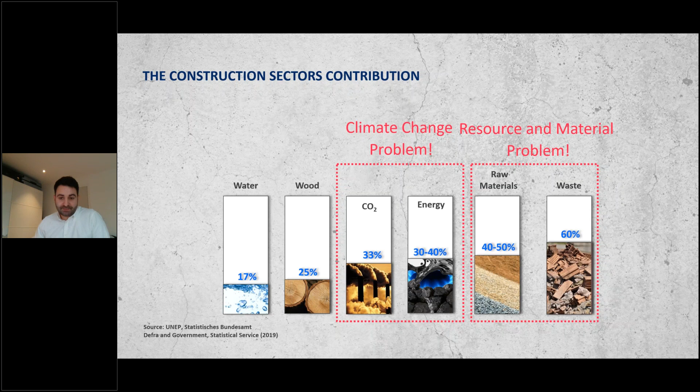With energy efficiency, we directly address the operational carbon footprint. You see here a carbon life cycle assessment of a tower in London which we analyzed recently, and you recognize in those carbon life cycle assessments typically that around 40 to 65% of the life cycle carbon is operational carbon, and the other part, around 35 to 60%, is embodied carbon, which is related to the materials we use. So at the point where we complete construction, we already emitted around 60,000 tons of carbon for such a tower.

To give you a scale, if you want to compensate that, you would need to run a wind park with around 17 turbines for 1 year. Compared to the operational carbon, which is around 5,000 tons per year, you would need to keep 2 wind turbines running throughout the entire lifetime of the project.

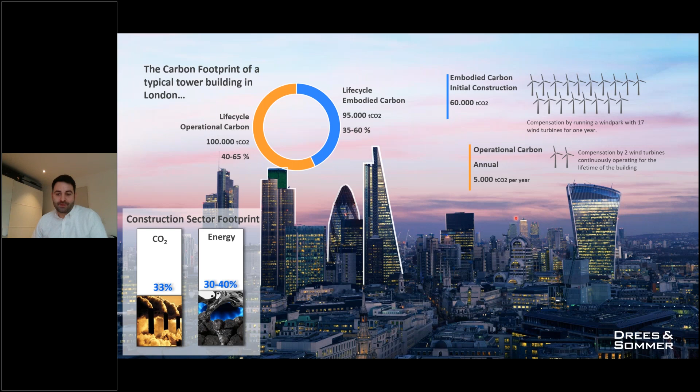To compensate operational carbon emissions, we address it with energy efficiency, and to compensate embodied carbon, we typically use circular economy principles. If we look into a carbon life cycle assessment, we can see that the carbon emissions are distributed over the life cycle of the building, with that initial peak of embodied carbon in blue color at the construction, and then in orange color a relatively constant band of operational carbon emissions.

Again, I think the answer to operational carbon is to move away from fossil fuel, utilize on-site renewable energy sources, and look into energy efficiency. And I think we have the technology in place today to push it to zero for new buildings, and even to develop plus energy buildings. It's, I think, rather a lack of collective will. Technology in the end is there.

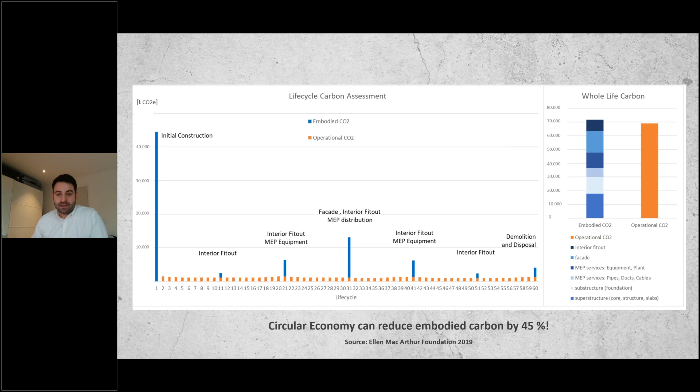A good example of a plus energy building is the City Hall in Freiburg, Germany, a building we designed a few years ago. It's now completed, and the plus energy case has been measured and verified by a third-party institute, the Fraunhofer Institute, which did an independent assessment.

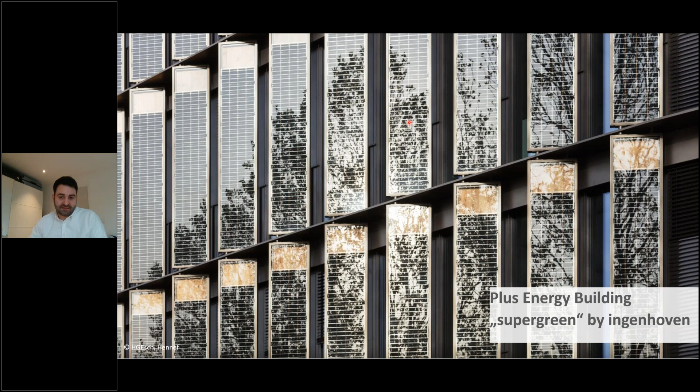One key strategy was to activate surfaces exposed to solar radiation with photovoltaic cells and integrate that into the architectural concept. That led us to these so-called solar fins. We have photovoltaic cells mounted on a timber panel sourced from the local region. The fins for shading are fixed. Originally, they were meant to turn with the sun, but due to maintenance and investment, we decided to fix them, calculating the best angle regarding daylight supply, shading, and solar harvest.

With those fins, the building is now able to produce energy on site. Temporarily, the building still consumes energy - it's not an autarkic building, so it needs the connection to the grid. On a cloudy winter day at -10 degrees with no sun, you still need to heat the building and take electricity from the public grid. However, on a spring day with a lot of sun, you'll produce more energy than you need. Over the annual balance, we could show that we produce more energy than we need, and that's why we can call it a plus energy building.

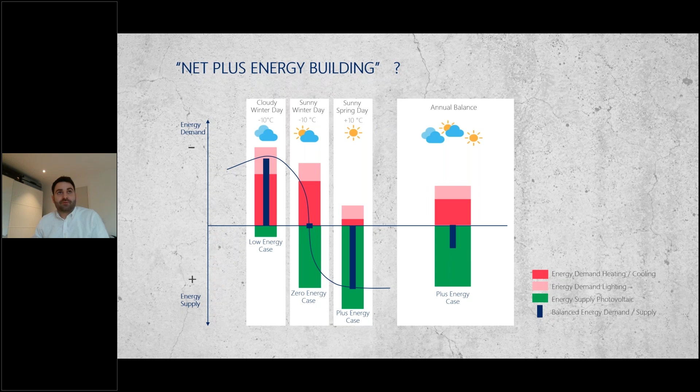So when it relates to carbon emissions, it would even compensate carbon emissions and provide clean electricity for the neighborhood. To achieve that, we developed a holistic energy and room climate concept, combining different measures. The first step is normally to develop a high-performance building envelope with the solar shading fins and a highly insulated facade, which brings the energy demand down to 50 kilowatt hours per square meter per year.

The second step is to develop a room climate concept which fits the envelope. We used a hybrid ventilation approach with seasonal natural ventilation, together with radiant heating and cooling through building mass activation. We have water pipes in the concrete slab, which can be cooled in summer, absorbing heat from the space without any fans. So it's a passive approach.

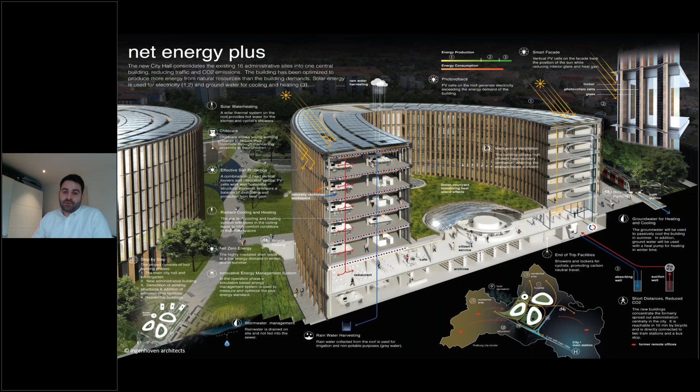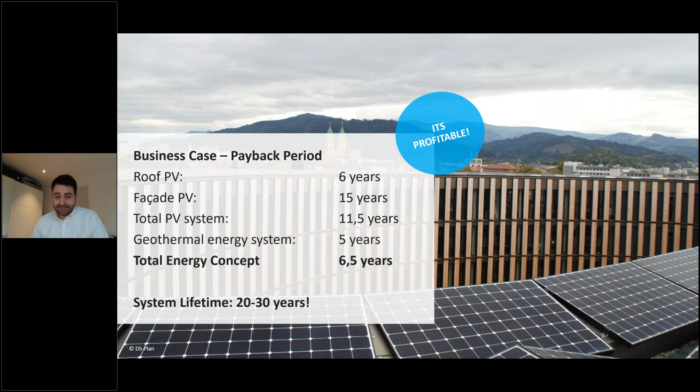The third step is to develop the energy concept, utilizing renewable energy on site. We have photovoltaic panels on the roof and facade, plus geothermal energy for heating and cooling. The important thing is that these energy efficiency measures pay back - the overall amortization period for the additional investment cost was 6.5 years. Considering the full life cycle of the project, we would save money compared to a conventional approach. So we consequently go this route now, and we also designed our own headquarters in Germany as a plus energy building.

We go one step further - we want to combine it also with smart building approaches. Again, it's a very similar approach. We have a very moderate window to wall ratio, and external shading which is flexible. We use triple glazing and insulation quality according to the Passive House standard.

We have green walls to provide passive cooling to the interior space, and the remaining heat and cooling load is absorbed by radiant heating and cooling panels, again passive without fans. That's supplied by a hybrid heat pump which can run on air - so it can be an air source heat pump, but it can also take energy from the ground through a ground source energy solution.

Again, to offset it on site, we use photovoltaic cells integrated into the roof. However, that's not enough to fully offset the energy demand, so we also integrate them on the south and west side of the facade.

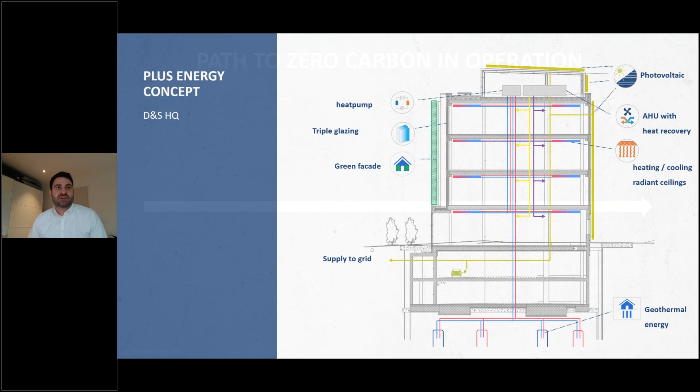So in the end, it's not rocket science. It's really just developing a holistic concept, bringing together the right approaches and measures. For us, the path to zero carbon always starts with reducing energy consumption, avoiding carbon emissions through shading measures, natural ventilation, and passive heating and cooling approaches.

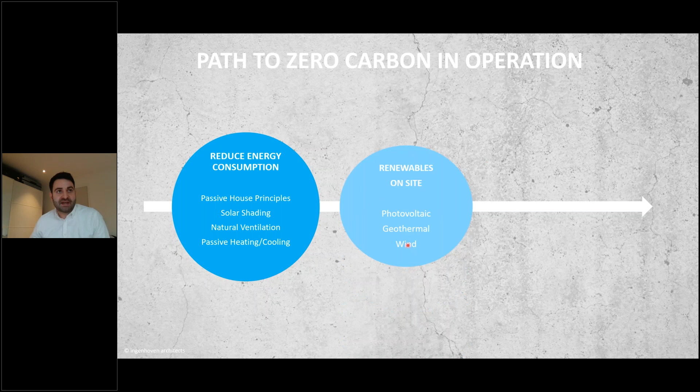Then we typically look into renewables on site - that can be photovoltaic or geothermal energy, as shown in the example. Sometimes wind is also possible. The last step is then offsetting.

Unfortunately, we see that many projects currently skip the two first stages. They directly go into offsetting because that's really easy. But from our perspective, it's not the way to go, because we would simply outsource the energy and climate change problem we have in our building sector to the utility sector. What we actually need is to solve that challenge.

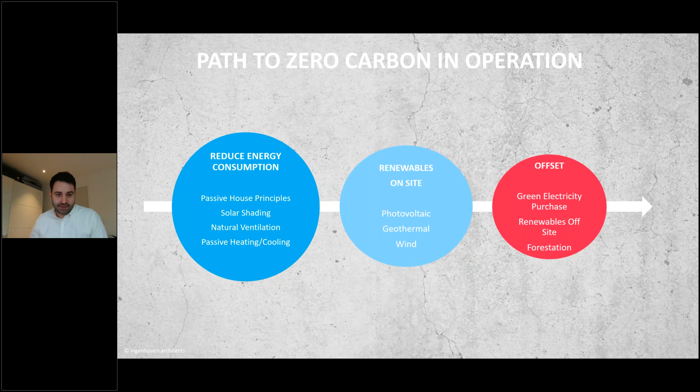Thank you very much, Marco. We're getting lots of questions in already, so thank you to the audience for that. Keep them coming. There's one specifically for you, Marco, from Andy, just asking about the nature of energy positive buildings. He's saying, surely at times in the year they generate excess electricity. So what do you do with that? Where does that energy go?

So in those cases, we feed it into the grid, because the grid is kind of an external buffer. But we also look more and more into local storages, so large-scale batteries. We worked on a master plan project where we had several buildings, and there it was even economically viable to set up a battery storage system. For smaller buildings, it often turns out not to be economical, and then you rather use the grid. But it definitely will become more and more an option in the future.

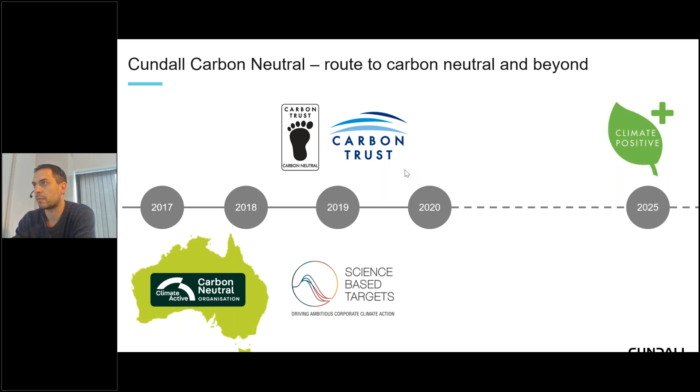We last year trialled to become carbon neutral in Australia, and we just applied that across our global business, and have been certified last month by the Carbon Trust to be carbon neutral across all three of our scopes. We're working towards our target to be carbon positive by 2025. It's been really useful learning how to reduce our own carbon footprint so we can apply it on our projects and with our clients, both at corporate level and at building level.

This is our trajectory. As indicated by the last speaker, Marco, we've been looking at energy reduction strategies, purchase of power around our scope 2 emissions, and then phasing out fossil fuels. We also have really challenging science-based targets, which are absolute reduction targets. So we're not just offsetting, we are reducing our impacts and then offsetting any residual emissions which are left over, and trying to reduce those over time.

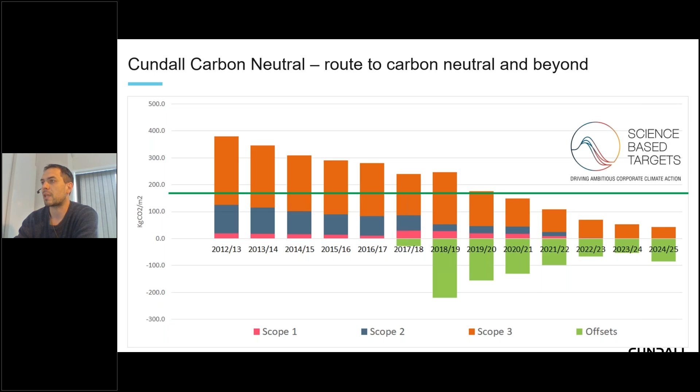It outlines what we mean by net zero carbon: reducing construction impact, reducing operational energy, increasing renewables on-site where possible, then off-site where not, and then offsetting any remaining carbon emissions. All of this needs to be publicly disclosed. But what I'm going to talk about today is the first two, which is the construction impact and operational energy, because what we don't want people to be doing is just jumping to the offset, as the previous speaker was talking about. We need to have clear targets on what reducing your construction impact is and operational energy is.

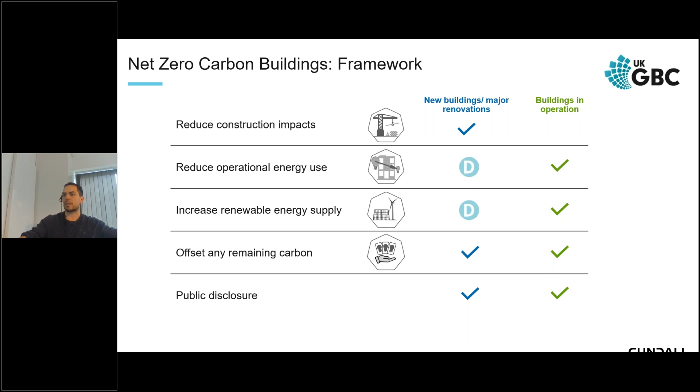So there's been a lot of talk about intensity targets and setting operational Paris-proof targets in line with a 1.5 degree scenario. The way that that's been done in the UK and a number of European countries now is to look at what is the amount of renewable energy we can produce as a country versus our demand.

At the moment, we only produce about 20 to 30% of the energy in the UK from renewables. In order to be a completely net zero carbon economy, we must increase the renewables that we produce, but also decrease the energy consumption on the grid. And if we reduce equally all sectors of the economy, it equates to roughly a 60% reduction in our operational energy requirements for buildings.

Other sectors will actually find it more difficult to decarbonise, so achieving that 60% might not be enough for the construction industry. We might need to go down to a 70% reduction. So these aren't minor tweaks or energy efficiency programs, these are complete system changes on how we actually go about designing buildings.

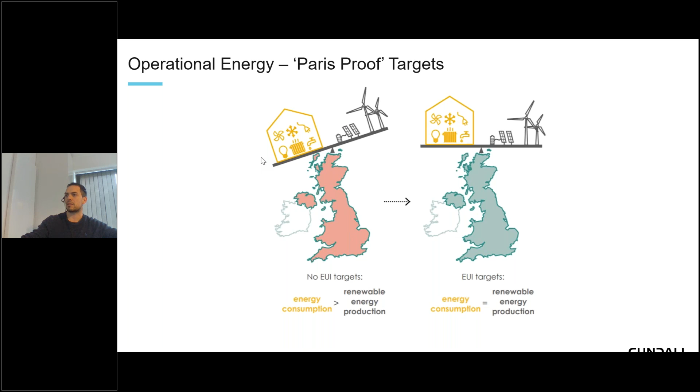As we reduce our operational carbon and the grid decarbonises, the importance of embodied carbon, the carbon associated with the construction of the building, becomes more important over time, and we can't ignore it any longer. We must start to consider it.

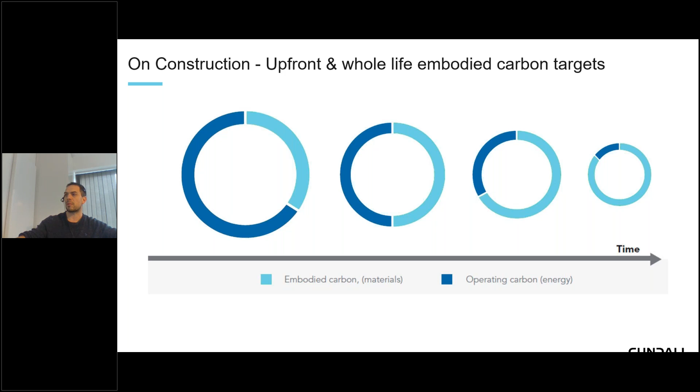When we talk about embodied carbon or whole life carbon, what we're talking about is all the materials that go into building a building, so their extraction, processing, transportation to site activities, all of that's classed as your upfront embodied carbon. Then during the building's life, you have its in-use carbon, which is maintenance, refurbishment, repair. And then at the end of its life, it's deconstruction and hopefully reuse of materials using the circular economy. All of these need to be considered and targets set at the beginning of a project.

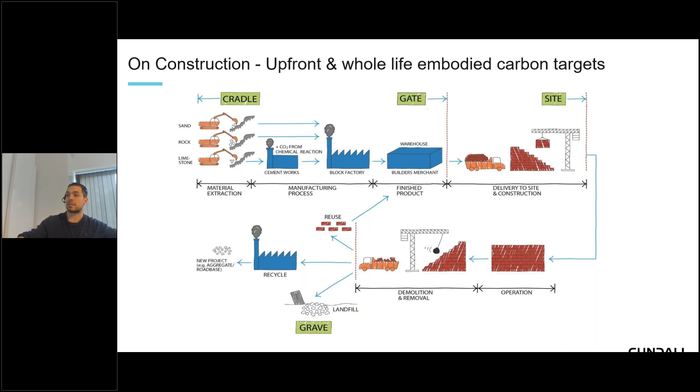In terms of embodied carbon, again, there's a Paris-proof methodology. At the moment, the average building in the UK is over 1,000 kilograms of CO2 per metre squared. There's numerous energy and carbon intensity targets being set at the moment around about the 500 and 300 mark, which show a significant reduction required.

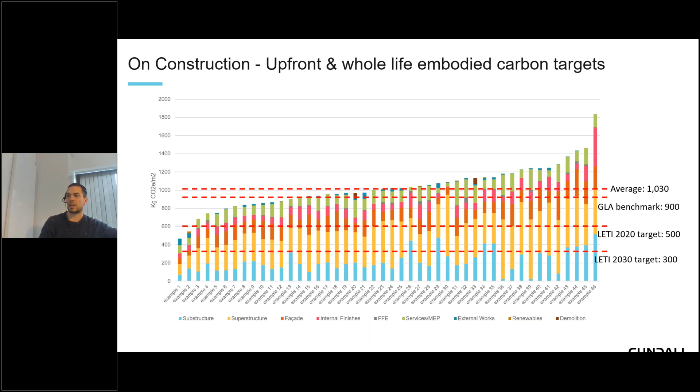This graph on the screen is something that we did with the GLA, looking at embodied carbon of some of the best performing buildings that have been built in London recently. You can see that most of these are significantly above that target. It's a really challenging target, and again, needs systems change on the way we actually go about designing new buildings.

So what we've done at Cundall is we've taken a lot of the frameworks that we've been working on with people like LETI, UK GBC, RIBA, and we've put together what we call our 7 steps to net zero carbon, focusing, as the previous speaker was talking about, on passive design, getting glazing areas correct, looking at natural ventilation, insulation levels towards passive house, reducing energy consumption and doing detailed analysis and control strategies, removing fossil fuels where possible and providing renewables on site, and then looking at power purchase agreements for any remainder.

Again, the examples of energy positive buildings are mostly 2 or 3 storey buildings. That's quite an impressive energy positive building at 6 storeys we've just seen, but when you're in urban environments, it's much more difficult to achieve that with the footprint of a building. So off-site is an option, especially in dense urban environments.

Also looking at limiting upfront embodied carbon, but also considering whole life carbon. So a solution might be low carbon on day one, but it might need replacing every few years. So we need to think about it in the lifetime of the building, either over 60 years or ideally over 100 years. And then transparency is going to be key going forward, that we're able to report transparently what we're doing, so it can be independently peer reviewed, so there isn't greenwash and it's all moving in the right direction.

Over the last year, we've seen a real drive around net zero carbon, but almost 95% or greater of the attention has been on new buildings. But the problem we have is that the net zero carbon target for 2050 is for all buildings. And if you think about 2050, 80% of the buildings that we're going to be occupying in 2050 are already built, and we really need to start focusing on existing assets.

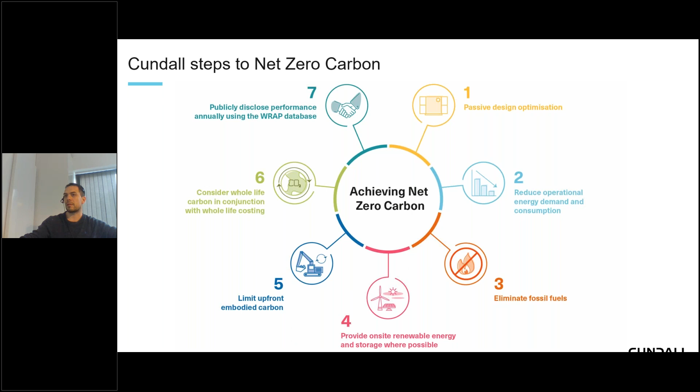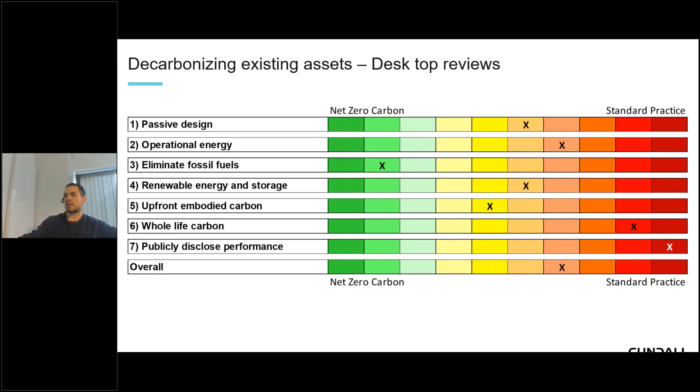So what we've been doing with a number of large portfolio owners is going into their existing assets and reviewing their assets against these 7 steps and setting pathways and trajectories to reduce their carbon emissions, scoring it against the net zero carbon criteria and making recommendations on how they can improve that.

Key to this is understanding where their current footprint is, and most buildings in the UK, the energy intensity is over 200, and getting down to the UK GBC or LETI target of 55 is an extremely challenging target, and it needs to be done over a period of time generally.

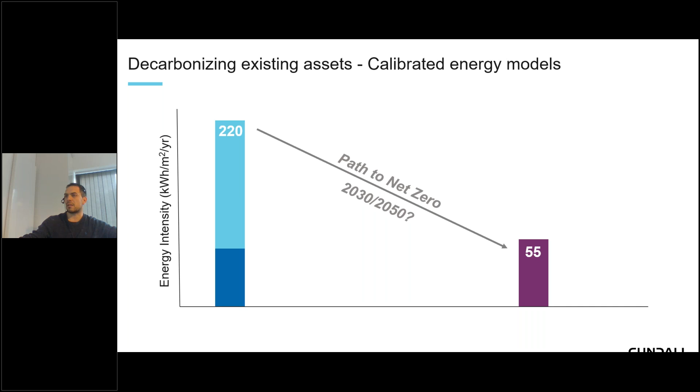So what we do is look at individual interventions, see how we can remove fossil fuels, and then look at things like replacing with electric systems, heat pumps, improving fabric, going to natural ventilation of openable windows, and looking at behavior change and engagement with the occupants.

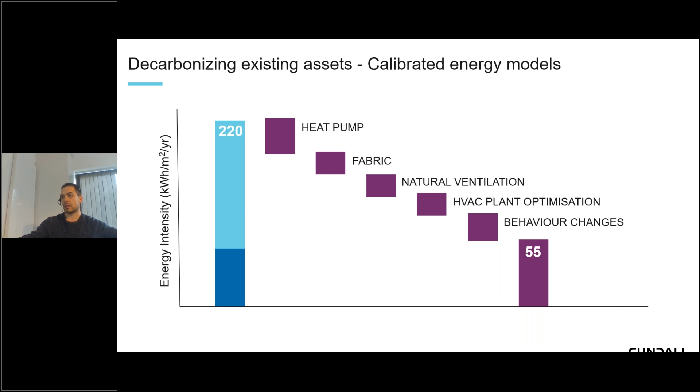The problem here is that there's no silver bullet. Technology will not solve the issue. We need to optimize the performance of all buildings to the best that they can actually achieve on all systems, and that takes time. For a new building, you have a budget and can do it all in one go. For most existing buildings, they have sitting tenants, existing plant, existing fabric, so it all needs to be factored into the plant replacement strategy. It needs to be thought about when to replace the fabric, when to replace services.

A good example is where you have a heating system. If we want to remove natural gas boilers, it's very easy to go into the boiler rooms and replace those for heat pumps, but they're generally not always compatible with the heat emitters in the space. So you have to understand when leases are coming up to the end of their life, when tenants are moving in and out, and take the opportunities when they arise to do these works.

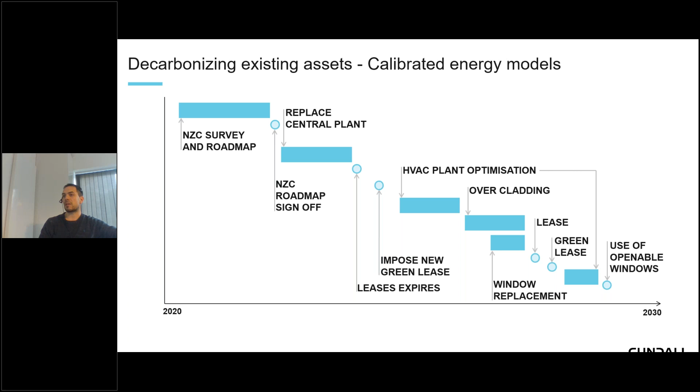A lot of our clients want to be net zero carbon by 2030, but they've got sitting tenants till later than those dates, and it's going to be extremely difficult to do so. Every building will have its own unique pathway of when these intervention measures will be done in order to achieve the targets.

Just to finish up with some quick wins and key considerations, so it doesn't need to be too daunting. There's lots of little things we can do, like LED replacements. Controls are another one - far too many buildings we go into have simultaneous heating and cooling because they've got set points at both 22 degrees for the two, with one zone heating next to one zone cooling, wasting significant energy. Just resetting controls and fine-tuning the control systems can save up to 20 to 30% in most buildings.

But then if we're looking at long-term interventions, the key ones you've seen in the case study we just saw: optimizing glazing areas, improving fabric performance, moving towards mixed mode ventilation where possible, relaxing set point temperatures to reduce energy significantly, and providing renewables where possible on site.

So these are some of the key considerations we're seeing with lots of clients at the moment. That was a quick tour of what we've been doing over the last couple of years around net zero carbon, and again, really interested to see what your questions are at the end.

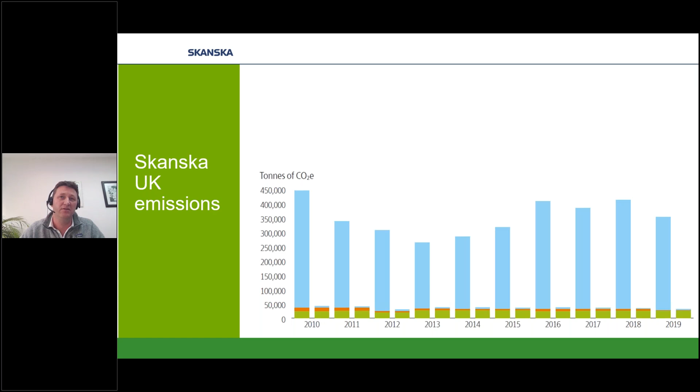Just to show you, measuring intensity as well as absolute emissions gives you an idea of how we're becoming more efficient as we're growing. It's fair to say Skanska's business in the UK is much bigger now than it was back in 2010. So there has been large reductions and improvements made by the industry as a whole, which is really encouraging, and I remain optimistic about how we can step up to this challenge.

It is also worth noting that all the information that's gone before is lagging, and often with embodied emissions and embodied activities, the design and procurement decisions can happen up to 2-3 years in advance of the actual carbon happening on site. So there is a lag effect with these emissions.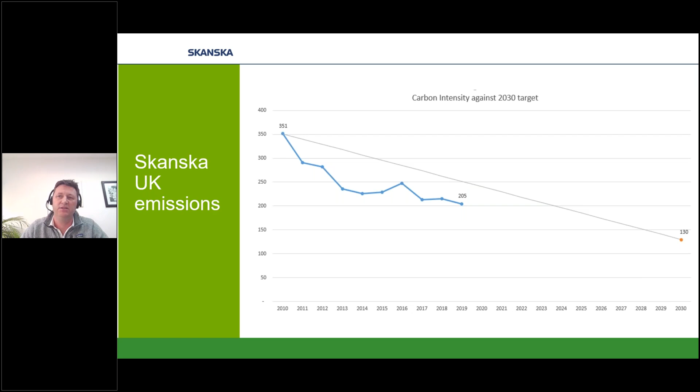What does it look like? This is important from an energy efficiency point of view. We have quite a reliance on the internal combustion engine. That's an important factor. We obviously have a huge reliance, a huge impact generated by the materials we use. So I think overall what's important to note from this is there is no silver bullet, as Simon said, when you're looking at it from a company point of view, and there's action needed across all areas.

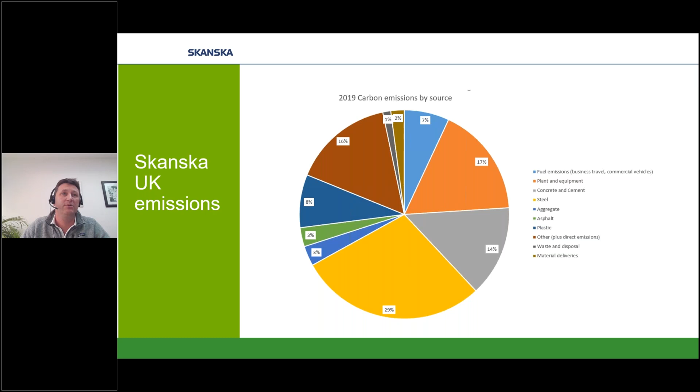So I'm going to skip through two very quickly which will obviously make a huge difference. The first one of those is the way we're delivering construction is improving hugely. We will see much greater digital tools, software enabling us to make much better decisions, collect data better, be able to perform and understand the life cycle implications of materials, and also the way we construct, being able to control the materials we're using in a better way to help reduce impacts.

Plant and equipment on site, definitely changing and set to change. Some pictures of some pilot studies we did with Volvo in a quarry that Skanska owns in Sweden, using electric autonomous dumper vehicles and that sort of thing. I don't think they're coming to a construction site anytime soon, but they're definitely on their way. So it's something to watch out for as we get much better at controlling plant, optimizing the use of plant much more, reducing idling, reducing waiting times between functions that the plant is needing to do for us.

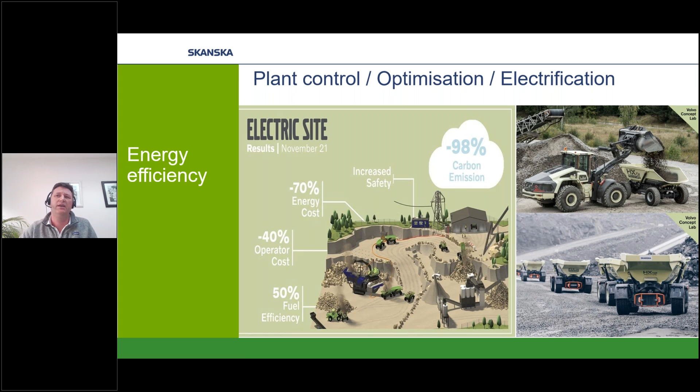And of course, electrification, but it's not only electrification — there will be substitute fuels as well, with the likes of HVO, or even potentially the role of hydrogen will play quite a role in changing the carbon impacts, but not always necessarily the energy efficiency. So, a couple of case studies.

Our new London office, we designed to follow the developing, at the time, UK GBC net zero framework. We plan to use this to help measure and demonstrate what we've done with the building. I think it's best to describe it as a deep refurbishment, so we're using the existing frame, which obviously makes a big difference when you're looking at the embodied carbon emissions.

We were also replacing all of the building services, so we went to an electric heating strategy for the building, with a very efficient HVAC plant and equipment and strategy.

But we also took steps to retain areas of the existing facade. On internal atriums and things like that, we were able to refurbish and repair rather than replace sometimes for the sake of it, retaining existing basement layouts and so on, just to really try and keep the carbon impacts down as far as we could.

The life cycle assessment on this building shows 75% of it is in the operation, even though we did as much as we could to cut down the embodied impacts. So the vast majority of this is in relation to electricity use.

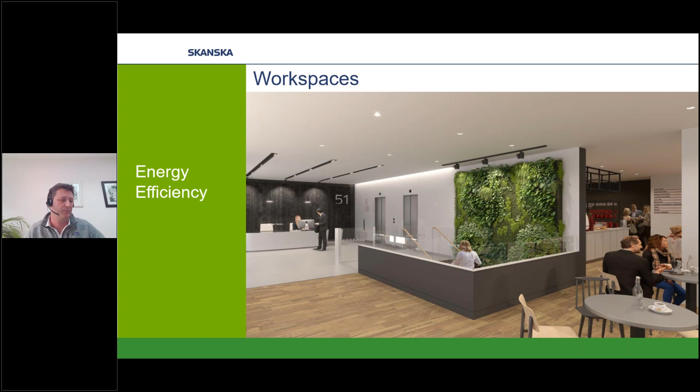Another example, and it was great to see, there's some certain similarities - in fact quite a few similarities with this and the case study from Germany that was shown earlier.

This is Skanska's involvement with a Norwegian consortium called Powerhouse. The aim of this is to develop energy positive buildings that are, if you like, a carbon proof for the future. So the initiative sets pretty strict rules on how it works, and it works within a quite tight carbon budget for the whole life. This carbon budget is reducing over the years, so future buildings have to work with less than the current buildings.

And the aim is to design these buildings to be energy positive - net positive across the course of the year, which was a useful definition from earlier. This building is quite a long way north in Norway, so it gets a lot of sun for some of the year and then not much for the rest, and I think that plays into how it works.

So the surplus energy here is stored. It's also supplied to neighbouring buildings, and there's investigation still ongoing about using it to charge electric buses, some of the electric buses that the city network has. So there are some great things that can come out of this sort of approach.

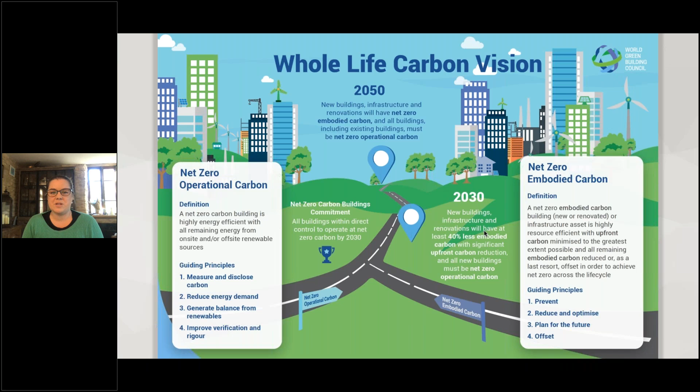And then using offsets, as Simon mentioned, as an absolute last resort to achieve that net zero balance, phasing out the use of offsets over time. We have a similar approach with embodied carbon, but today we'll just stick with the energy efficiency side of things.

This is the Bullitt Center, an office building in Seattle, Washington State, in the US. It's a 5-story building - or 6, since it goes into the basement - and it achieved the Living Building Challenge Net Positive certification scheme. It was first completed in 2013 and achieved that performance in 2015, but of course it took several years through the design process to get to that point.

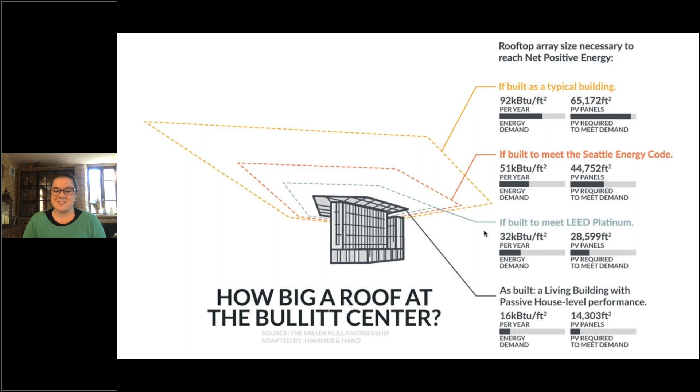But you can also see that the size of that solar farm is getting bigger and bigger if that building had been built to meet the local Seattle Energy Code, or indeed to be built as a typical building within the US. This shows the massive role of both energy efficiency and policy to help drive these high performance buildings and reduce energy consumption. This was a program and building completed several years ago, and if they could do it then, we certainly can today.

So around the world, Green Building Councils are busy developing lots of different programs to help drive net zero buildings within their market and really drive us towards that net zero vision. Depending on how the market is positioned currently will determine the scope of their frameworks. For example, we've already heard about the one from UK GBC on whole life carbon.

In Germany, the DGNB certification scheme with Climate Positive has required LCA for more than 10 years. Some markets, such as Brazil or India, are focusing for now just on operational performance, certifying buildings that can achieve zero energy in use, based on metered data.

And then other markets, such as Singapore, there's a real challenge for the amount of area, both on buildings and within the state itself, to generate enough renewable energy. Their focus is on driving super low energy buildings to make sure they're net zero ready in anticipation for a zero energy grid. So we're really ensuring that energy efficiency is at the heart of these net zero programs.

Each country, each national green building council will set different levels of performance depending on whatever the local market is used to, and it will help certify and verify that performance through the certification schemes that are available.

I wanted to leave you with thoughts that came out very recently, from an event yesterday held as part of the Race to Zero November dialogues leading up to COP26. This was the built environment session, and in one of the first segments of the day we were discussing how we achieve a common vision across the entire building and construction sector in order to achieve a decarbonised built environment, for both new buildings and existing buildings.

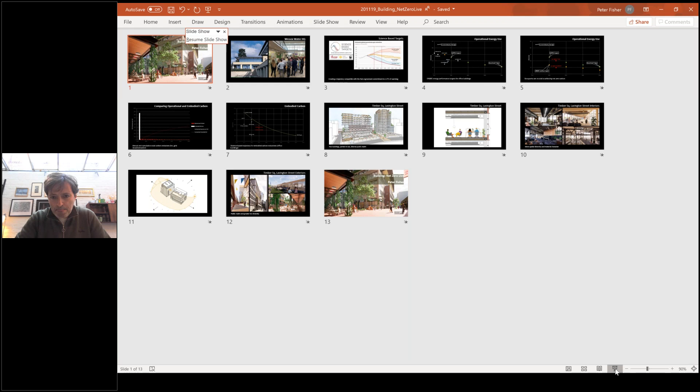I thought I would just start. I was going to try and contextualize things a little bit and then look at one case study. But I thought where I'd start was actually not by looking forwards, but in a sense by looking backwards.

This is Wessex Water, a building that we completed 20 years ago this year. Partly to celebrate that milestone, it was rated as the most environmental office building in the UK at the time of its completion, and it's still got exactly the same chief executive based in the building. So we've been back over the last year with Buro Happold and started looking at the building again and looking at the POE of the building.

And interestingly, if the gas boilers of this building were changed to air source heat pumps, it would constitute net zero carbon under the UK GBC framework.

And the point of saying that is, I think there's often an emphasis or a lens placed on technology and new techniques. And actually, a little bit like Victoria was just saying, a lot of the techniques we already have. If a building from 20 years ago that is unaltered could be net zero carbon today simply by changing its boilers, then a lot of those lessons, which are quite simple, are already there. We don't have to learn quite as much as I think is sometimes thought. And actually the prospect isn't quite as daunting, certainly not for new buildings.

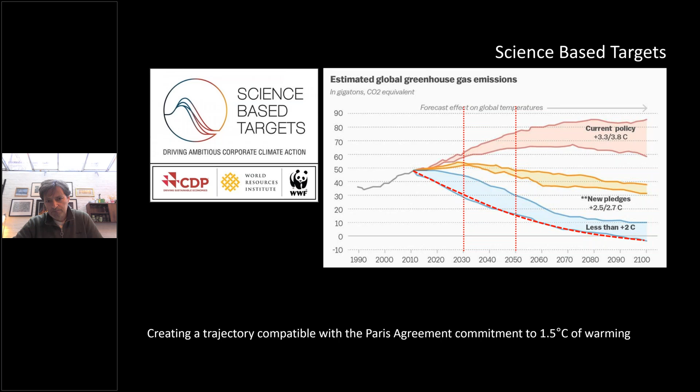So if we move to, say, the operational energy intensity of office buildings, the current average in Britain is somewhere just north of 200 kilowatt hours per meter squared per annum. And we begin looking at science-based type trajectories down to a Paris-proof target of just over 50, then we get something akin to those UK GBC targets as they're going every 5 years, incrementally stepping down.

And the interesting thing there is once we begin to blend in—this is a series of projects that we've worked on over a number of years—some of those projects, including Wessex, are already getting pretty close to some of those targets.

And then the project that I'm going to come on to talk about in a little bit of detail is Lavington Street, or Timber Square as it's now known, which we're working towards going onto site with Landsec down in Southwark at the moment.

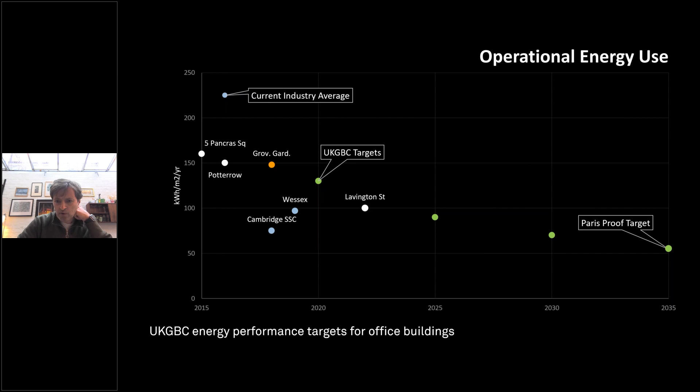And its overall targets are on that trajectory, albeit there's a lot of work going on in the background to try and bring that even further down.

On the new build components, the interesting thing is once you understand the landlord and tenant split of energy consumption, the totals are still looking relatively high, even though the landlord components are getting tolerably close, and in fact now have a plan for getting to the 2035 targets. But the rest of that makeup, really over half of the difference between the landlord and the total, is on-site IT usage and on-site servers and the associated cooling with those.

So there are huge strides required, not only in the way that we design buildings, but actually in the way that they're occupied, and that's going to be the biggest factor. I think that's probably one of the unknown and understood factors going forwards.

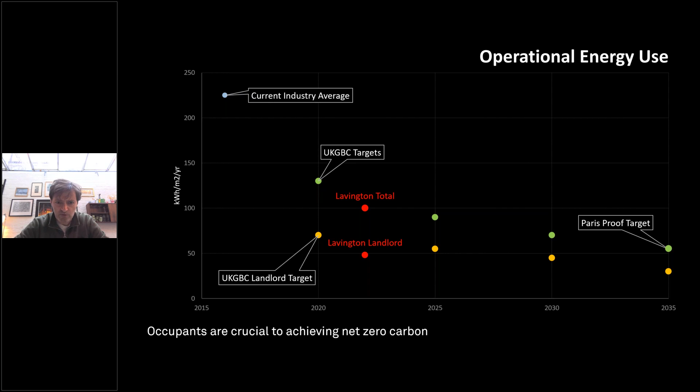So I think if there's a lesson out of this, it's really that embodied carbon and the existing building stock are where the difficulty is, not to underemphasize the role of new buildings or the difficulty of that, but we are within shouting distance of being able to deliver quite convincingly net zero carbon new buildings.

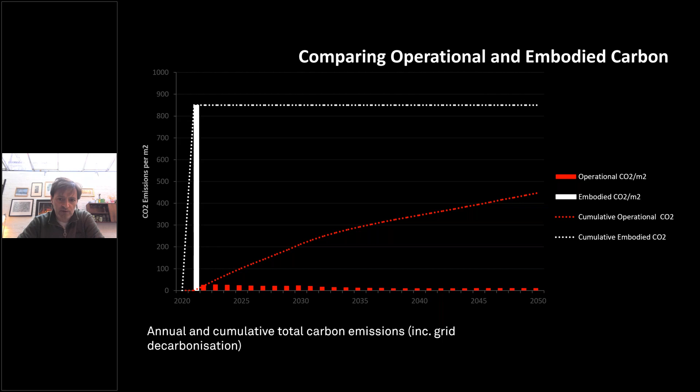When we take embodied carbon and apply a similar science-based trajectory to the current average of somewhere just north of 1,000 kilograms per meter squared, we get to a target in 2050 somewhere around the 200 mark, which is where we need to get to.

Again, if we blend in a series of fairly typical good practice buildings, they're pretty close to that trajectory. And then Lavington Street, which is what we're working on at the moment, even including sequestration, there's still a lot of work to do on that. The targets we're working towards now are somewhere sub 400, but even the difference between sub 400 and getting down to 200 kilograms per meter squared is really quite marked. There's quite a lot of work to be done to get to those levels.

And Grosvenor Gardens is the new components of a refurbishment project, so there's still a lot of work to do on those kinds of things as well.

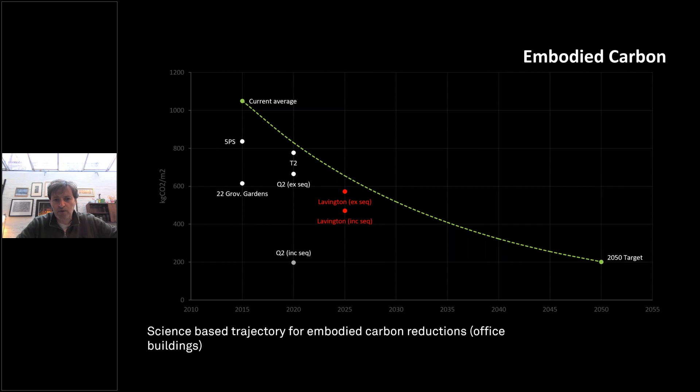Moving on to look very briefly at Lavington Street, or Timber Square and Lavington Street, which combines a whole series of these varying strategies. Half of it is a complete new build and half of it is half reuse and half extension.

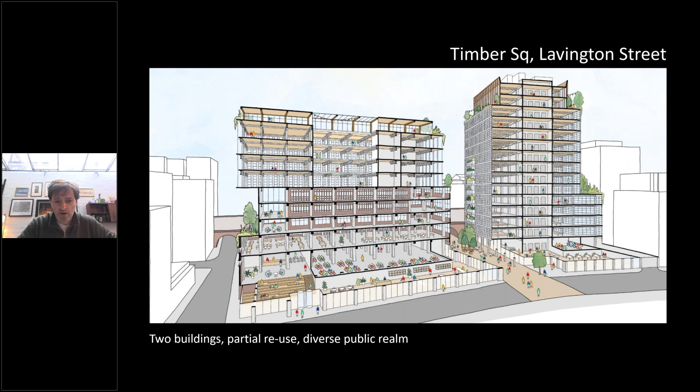It's looking at different types of materials to what we normally use in office buildings in London, so it's mostly cross-laminated timber on a steel primary frame. That results in a building that's about 20 to 25% lighter than is typical for this kind of building, which has benefits in foundations etc., and also enables us to build on top of existing buildings.

So the construction is fairly straightforward. A lot of what we've been looking at on this project has been missing out finishes that we don't think we need. Things such as ceilings, trying to have everything self-finished, so there's no plasterboard as far as possible in the cores, no ceilings in the back of house areas, looking at the type of flooring materials to miss those out, and then also just having exposed steel primary frame on a 6-meter grid and cross-laminated timber planks.

And then looking as well at the servicing strategies going forward. Can it be mixed mode? How well shaded is it? And the varying shade servicing options, from 4-pipe fan coils to mixed mode to chilled beams as upgrades that are possible. But quite a lot of the real changes that will come in a building such as this will be from the tenant and from the IT loads.

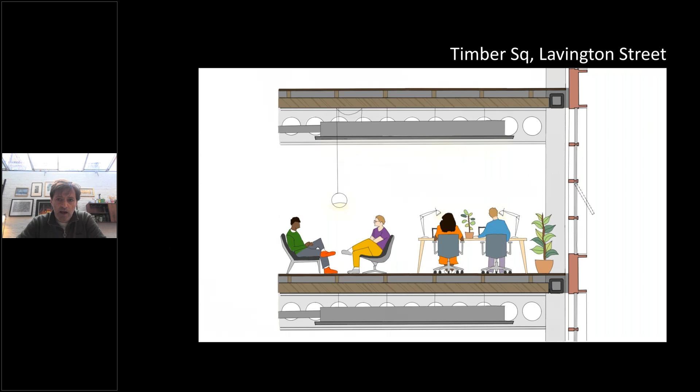And then we hope as well as driving buildings that consume less energy and less carbon in their construction, using warmer materials, having finishes that are simply not installed, so the building has a much more raw and visceral quality, more natural materials and more reused materials. I think a big part of our hope is not only is this a more environmentally benign future, but hopefully a slightly more humane, more pleasant and a much warmer, more characterful one as well.

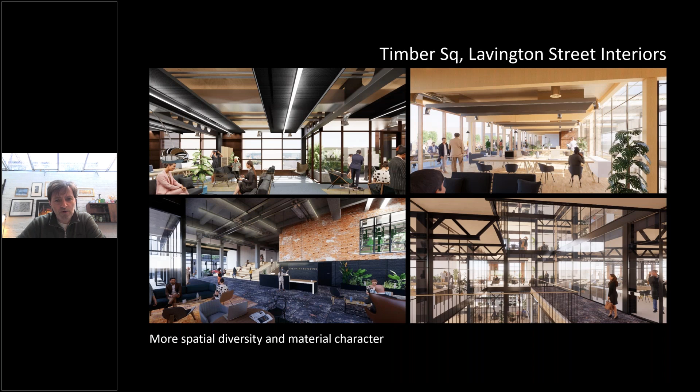And we hope that from that you get buildings that are also much nicer and with much better connection to outside and more use of external space within office buildings.

And then one of the final pieces in this really is also just getting the basics right. As we move around the building, its glazing ratios change quite considerably. They change as you move from north to east to south, and also as you move up the building, so it gets more solid as you move up. It changes from glazing ratios of almost 80% on the north facade to less than 40% on the upper portions of the south facades.